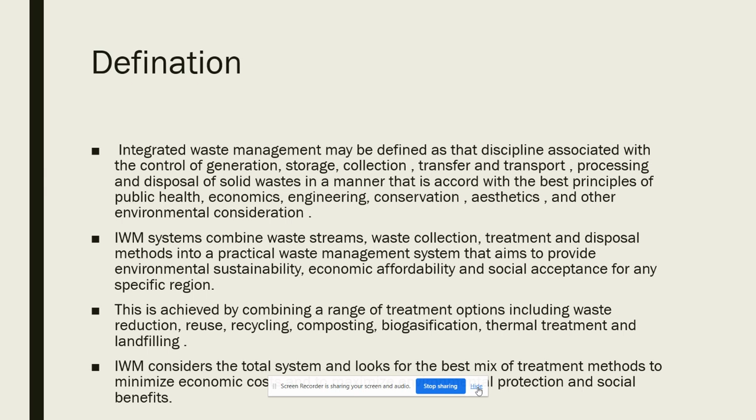So we can say that the integrated waste management system combines the waste streams, waste collection, treatment, and disposal methods into a practical waste management system that aims to provide environmental sustainability, economic affordability, and social acceptance for any specific region. This management is achieved by combining a range of treatments that include reduction of waste, reuse, recycling, composting,

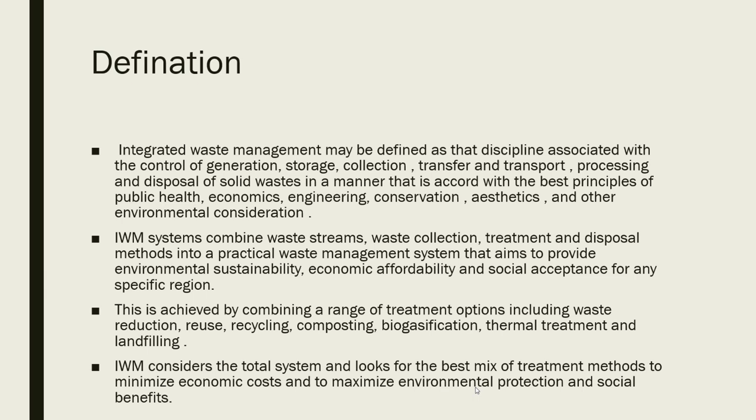biogasification, etc. So integrated waste management is the best mix of treatments to minimize the economic cost and to maximize the environmental protection and social benefits.

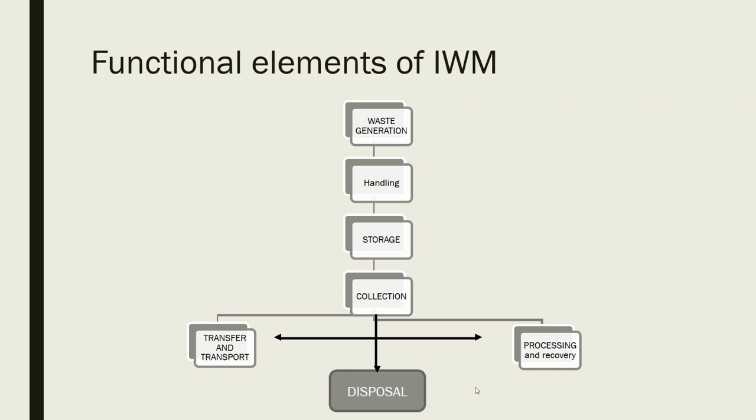So these are the functional elements of integrated waste management. First, waste generation control, then handling, storage, collection, and after the collection of the waste, it can either be transferred and transported to the processing or recovery site or the disposal site.

First one is waste generation. Waste generation encompasses those activities in which materials are identified as no longer being of value and are either thrown away or gathered together for disposal. The generation rate is the measure of the rate at which waste is generated, which can be measured by weight volume analysis, load count analysis, and material balance analysis.

The reason for measuring the generation rate is to obtain data that can be used to determine the total amount of waste to be managed. And one point I want to mention here is that waste generation is carried out at the individual level.

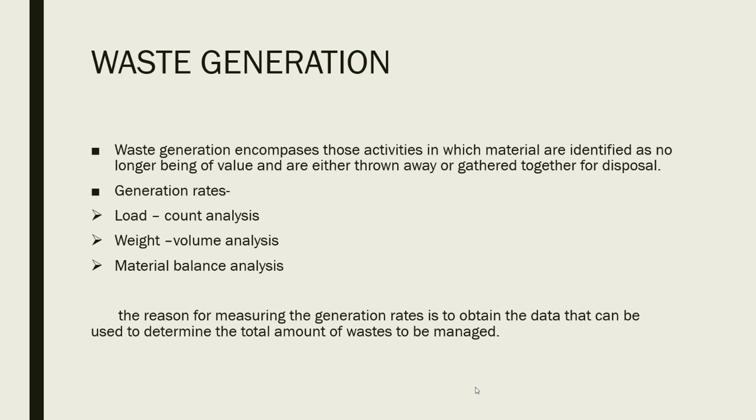For example, waste like paper is waste for me and I dispose of it. Whereas a person who finds it useful can use it in their art and craft. So it is not a waste for him or her. So waste generation takes place at the individual level.

Second is on-site handling. It is the second functional element of integrated waste management, and on-site handling refers to the activities associated with the handling of solid waste until it is placed in the containers used for storage before collection.

So here is the table. We know that on-site handling is carried out at the residential, industrial, agricultural, and commercial level. Here is the table in which the source of waste generation is given on the left-hand side, and the person responsible and the equipment facilities required for handling the waste are given on the right-hand side.

So we can analyze that in residential areas, resident tenants, building maintenance crews, and janitorial services are responsible for handling the waste, and equipment used for handling the waste includes pneumatic conveyors, collection carts, and household compactors.

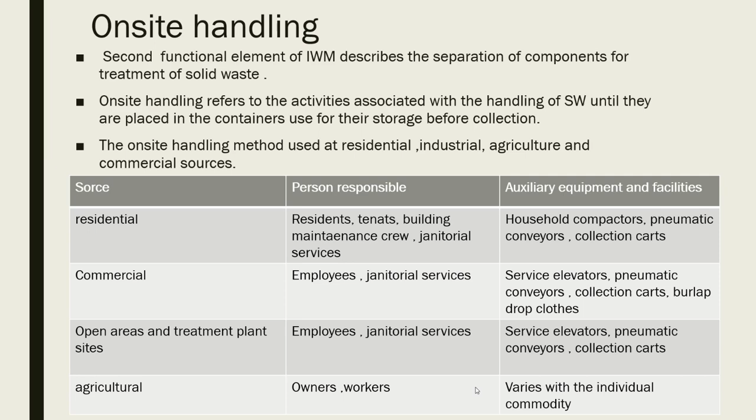Collection carts we have all seen in our locality, but pneumatic conveyors are devices usually used to carry bulk material through a pipe by air pressure. So there are different types of equipment and persons responsible for handling the waste.

On-site storage. This is also an important functional unit of integrated waste management in which solid waste is stored at or near the source of generation before primary collection. There are factors that must be considered in on-site storage. For example, the type of container to be used. The most important point is that it depends on the waste generated.

For lightweight waste, we can usually use poly bags, paper bags, etc. But for high density waste, we can use a plastic container, given here in the table, and galvanized; and if the waste is biodegradable and hazardous, then we can use galvanized storage, like a galvanized dustbin, for that purpose. It is made of iron and is galvanized with zinc to prevent the oxidation of the iron.

So the container location should also be considered before storage, and public health and aesthetics are also a main concern. Public health is related to storage, as the waste generated can lead to infestation of rats and flies, which will ultimately lead to public health concerns, and aesthetics is related to the odor of the waste.

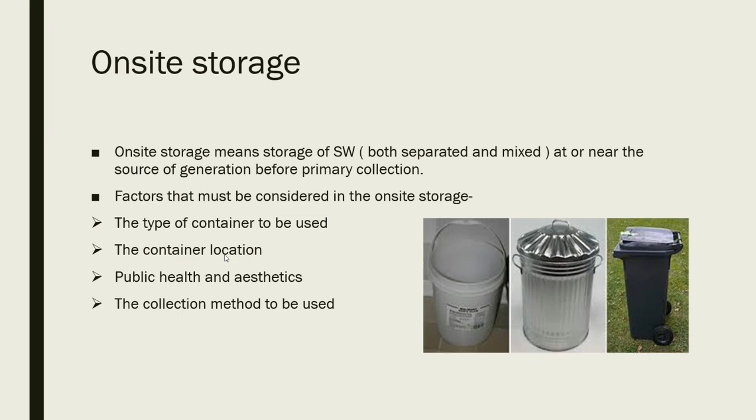The collection method used is also an important point to be considered. Collection is part of the process of integrated waste management. It is a transfer of solid waste from the point of use and disposal to the point of treatment. Unloading of the collection vehicle is also considered part of the collection operation. Collections are made at the municipal and district council level, and also by private firms under contract with the municipality or with private residents.

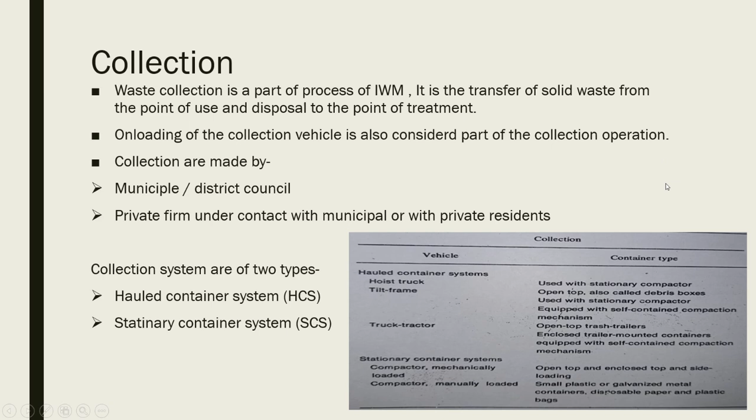The collection systems are of two types: the hauled container system and the stationary container system. In the hauled container system, the container filled with waste is carried out to the disposal site. Whereas in the stationary container system, the container is first emptied out, and then only the waste is carried to the disposal site. Here are some vehicles and container types used in both systems, given in this table. You can analyze this table.

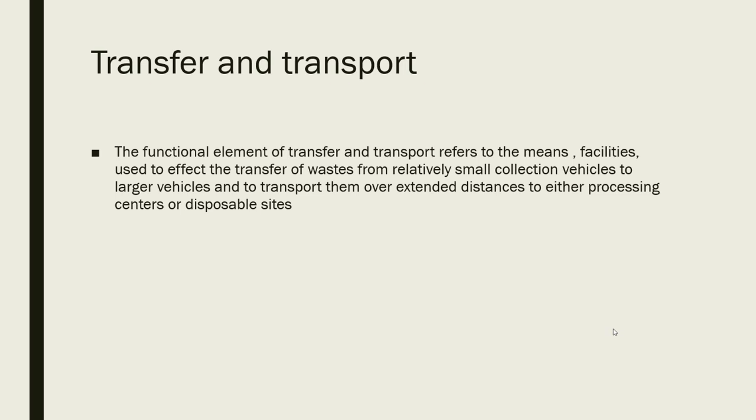Transfer and transport is the third functional element, and it refers to the means and facilities used to effect the transfer of waste from relatively small collection vehicles to larger vehicles, to transport them over extended distances either to the processing center or to the disposal site.

Processing of solid waste is the most important part of solid waste management, as these techniques are used to improve the efficiency of operation, to recover resources, and to recover conversion products and energy. That is the main important thing to do.

Objectives of on-site processing: the first is mechanical volume reduction, carried out with compaction and compactor machines. Chemical volume reduction is carried out by incineration and incinerator machines. Mechanical size reduction is carried out by shredding and pulverizer machines. Component separation can be done manually or mechanically.

Drying and dewatering is the moisture content reduction, which can be done by convection, conduction, radiation dryers, rotary drum dryers, centrifugation, and filtration methods like vacuum filtration, high pressure filtration, and low pressure filtration. All these help in drying and dewatering, as it is important because processing dry solid waste is far easier than processing wet waste, and the cost of dry waste processing is also lower.

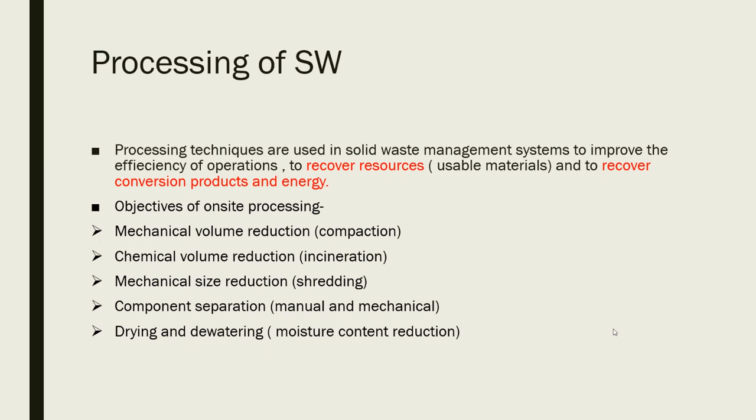Grinding is done by home grinders, used for waste prepared from cooking and serving of food, etc. They cannot be used for bulky items.

Sorting: sorting and separation of waste paper, cans, and glass by hand at the household level is one of the most positive ways to differentiate or segregate waste for recovery and reuse of material. Sorting can improve the processing of waste and also the recovery of waste. It is the main thing to do at the household level, which we all can do, and we should do it to segregate waste into different containers so as to ease the process of recovery.

Compaction involves the reduction of the overall volume of waste by up to 60%. Various compactors like stationary compactors, movable compactors, high pressure compactors, and low pressure compactors are used for compaction.

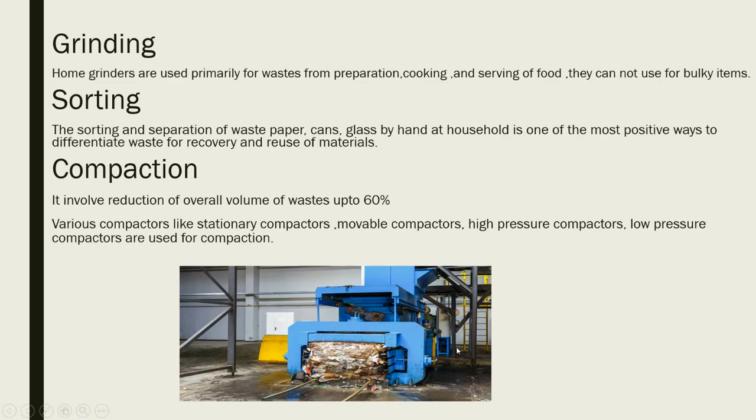The second one is incineration. Incineration is the most widely used method for chemically reducing the volume of waste. It can reduce the waste chemically as well as reduce its volume. It is the combustion of waste at a very high temperature to convert it into ash, heat, and gases. Incineration can be used to reduce the original volume of combustible solid waste by up to 80 to 90%.

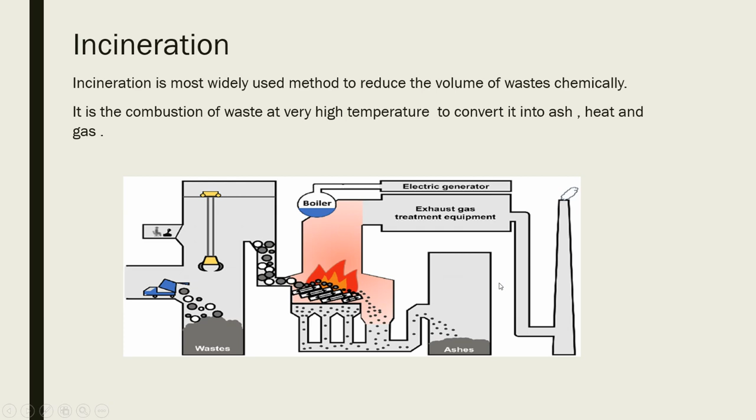But in today's world there are many techniques, and modern incinerators are coming with equipment attached to treat the gases and particulates and filter out the particulate matter, as we can see in this picture.

Next is the shredding and pulping of the waste. This is used to convert large size waste into small pieces, and various techniques are used for shredding, like pulverizer machines, grinders, hydropulpers, shredders, hammer mills, and jaw crushers.

Why is it called the pulper tank? Because water is added in the pulper tank at a maintained or proper level, and the pulp is generated with the help of the impellers.

Waste is shredded into a pulp by the impeller plates, and non-pulpable elements like metal and glass are discharged into the collection chamber.

The pulp and slurry pass through a sizing ring and are discharged to the dewatering press. In the dewatering press, water is extracted and the semi-dry pulp is discharged into another container.

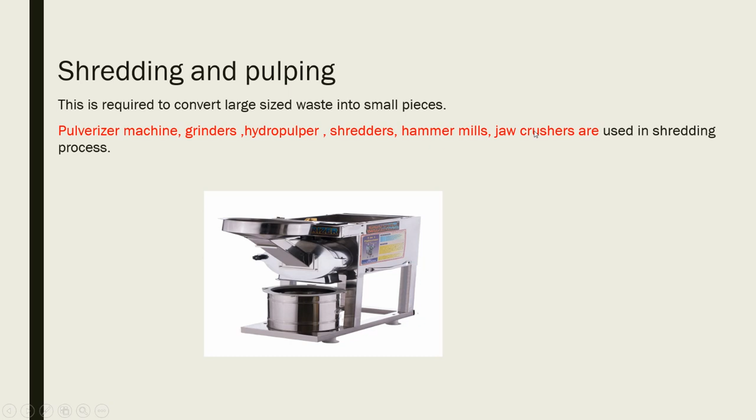Second is the recovery of the solid waste. That is the most important point to do. Recovery of material by reuse, recycle, and we can recover these. By use of the 3 R's, we can maintain the environment safe.

The components which are more amenable to recovery, for which the market exists, are present in the waste, like metals - we can say the alloy - which can be used further in various types of industries to produce a new product. So we can recover those things from the waste efficiently, and they can be separated for reuse.

And the equipment used for this is the flow sheet. Flow sheet has various types of machines attached to it, and the waste is allowed to flow on the flow sheet and accelerated, with further analysis.

First it is allowed to go into the shredders. In shredders the waste size is reduced. Then after that, it is allowed to move towards the drying and dewatering machinery.

After the drying and dewatering machinery, the dust particles are removed, and after the dust particles are removed, they are allowed to flow to the ferrous extracting machinery.

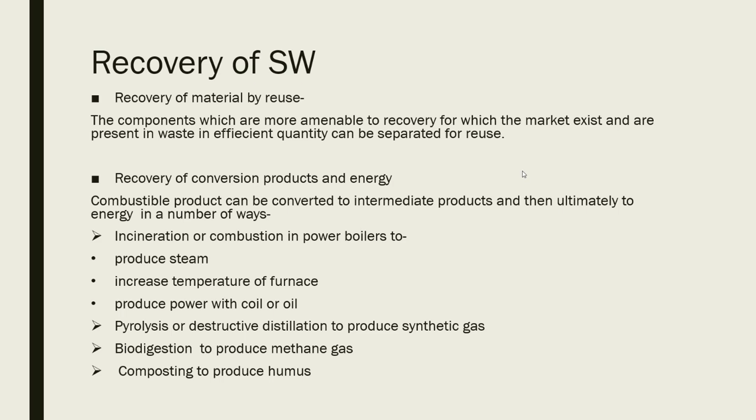Pyrolysis means the chemical decomposition in the presence of high temperature induced in the organic material in the absence of oxygen. The point to be noted here is that in pyrolysis, the chemical decomposition at high temperature is done in the absence of oxygen.

But in case of incineration, there is combustion - that is chemical decomposition in the presence of high temperature but in the presence of oxygen. In pyrolysis, there is an absence of oxygen.

Pyrolysis occurs under pressure at an operating temperature above 430 degrees centigrade, and it is of three types: vacuum pyrolysis, anhydrous pyrolysis, and hydrous pyrolysis. Vacuum pyrolysis is carried out in the absence of air, and hydrous pyrolysis is carried out in the presence of water.

Advantage of pyrolysis - one important point to be noted here is that pyrolysis is a type of destructive distillation. That means in pyrolysis, the decomposition is done at high temperature in the absence of oxygen, which is also called destructive distillation. So another term used for pyrolysis is destructive distillation.

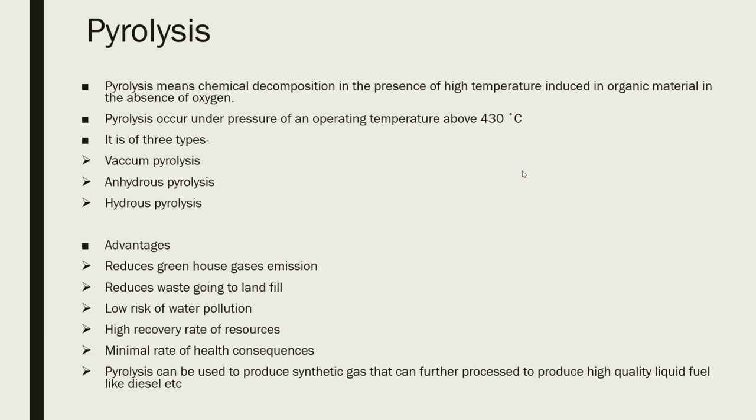Composting. So another method of treating municipal solid waste is composting, a biological process in which the organic portion of refuse is allowed to decompose under carefully controlled conditions. Microbes metabolize the organic waste material and reduce its volume by as much as 50%. That is what we want, to reduce the waste. So the stabilized product is also called compost or humus. It resembles potting soil in texture and odor and may be used as a soil conditioner and a soil fertilizer. It is an organic fertilizer.

So, humus is dark brown or black in color. It has a low carbon to nitrogen ratio. That means it has a high nitrogen level, which is very important for plants to grow. It has high capacity for base exchange and for water absorption, which plants usually need to grow. So, composting offers a method of processing and recycling both garbage and sewage sludge in one operation.